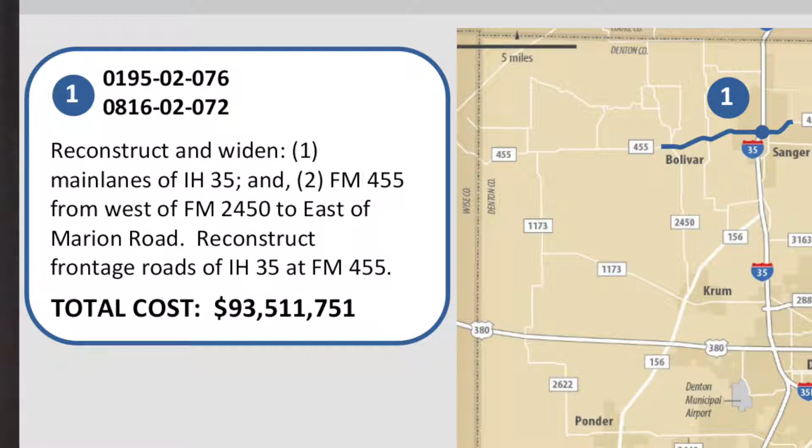The first one I'll talk about today is in the northern part of the county. This is the FM 455 interchange on 35 up north, including quite a bit of FM 455 as well, going through Sanger, headed west out to Bolivar. This is reconstructing and widening the main lanes of 35. It's not a capacity job for 35, but it is reconstructing the interchange at 455. It will be kind of that full build out, get a little piece of the frontage roads, but the main thing is to reconstruct the interchange as well as 455, and it goes from about FM 2450 to east of Marion Road. Again, it'll get a little bit of the frontage roads, but that's really not the primary purpose, which is mainly to get that interchange done.

So this is about a $93 million project. It let last week for construction, so we should be awarding that toward the end of July. If you've been out in that area, you've seen a lot of dirt turning already, and that's been the utilities relocating. We ought to see construction start probably around the November timeframe on this. So that is our 455 interchange project.

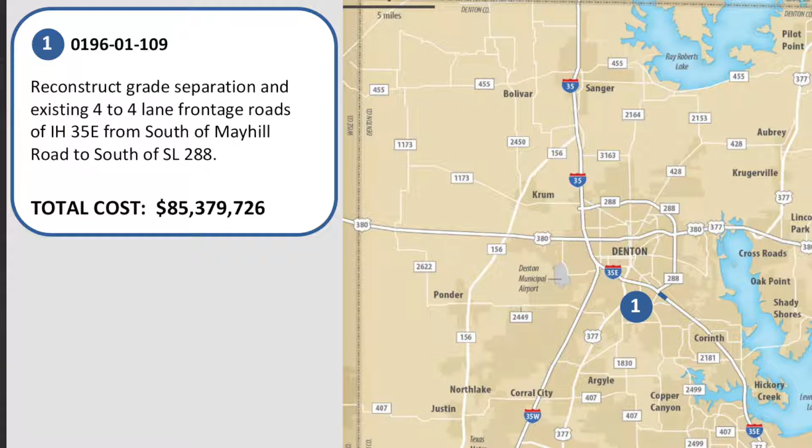Moving along, this is what we call our Mayhill job. I got a question on this one a minute ago, and I do have a slide for it. So we're working on what started as a reconstruction of the Mayhill interchange on 35E, south of Loop 288, and it has kind of grown into addressing some other issues in that area. It's going to reconstruct the frontage roads from Mayhill all the way to Loop 288, in addition to installing a couple of bypasses at Brinker.

If anybody's familiar with that area, there's a lot of traffic backup at Brinker, so when this project is complete, it'll add some bridges that you can bypass. If you're trying to get to Loop 288 northbound, for instance, or Lillian Miller, you can just bypass Brinker and won't have to stop at that light. So this is a really exciting project for us.

It's about $85 million, and the biggest focal point would be reconstructing Mayhill and widening underneath Mayhill to match both sides, because currently I think we're 4 or 6 lanes on either side of it now. So it'll open up underneath and give capacity under the roadway for Mayhill, also reconstruct some of the main lanes at 35, and then also all those frontage roads from Mayhill to Loop 288. This is a big project we've got coming. We're looking at probably letting toward the end of next year timeframe.

Also on 35, so I guess I jumped the gun, but big surprise, we're working on 35 some more, everybody. I hope everybody's really excited. I know there's probably a lot of shock, but anyway, to keep going, this is 35W. This is a very large project, and we're still working out all the funding because it's a little over $300 million.

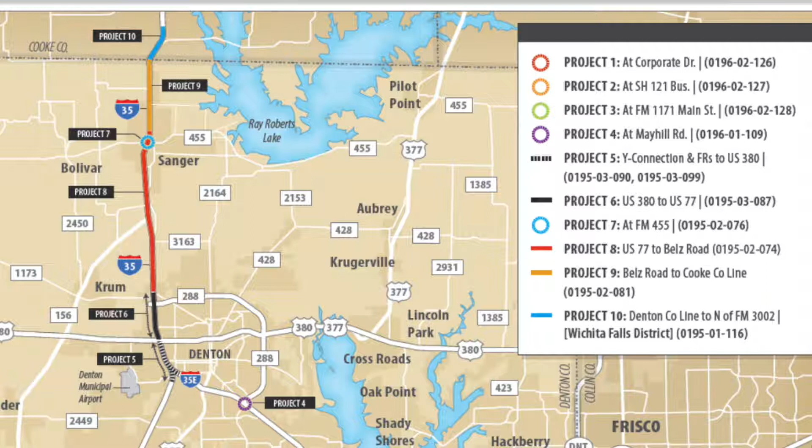Kind of the next biggest one is going to be the 35E and W. Depends on who you're talking to - some people call it the merge, some call it the split, I guess depending on which way you're coming. But I tend to call it the merge. So 35E and W, where we're reconstructing, it's basically going to be right where E and W come together, at Bonnie Brae and just south on W, and it'll go up through US 77. It'll go through 380, through Loop 288, and hit US 77. So that's going to be a very large project.

Little over $450 million right now, depending on when we actually go to construction. So that'll be a full reconstruction. Again, if you're familiar with the area, you probably saw us flip some ramps in the past year. That was a very successful project, we think, and we've got partners from City of Denton - we worked very closely with them. We were very pleased to get that deployed, and it's definitely helped, but this is going to be the ultimate construction of that. So this is building on some of the work we did there, but it's going to reconstruct the main lanes, the frontage roads, and the ramping in all of that area.

Are you guys through with, okay, where 380 and University intersect there, and y'all added another lane? Is that finished, or are you guys doing anything else? Yes, right there at the exit from 35.

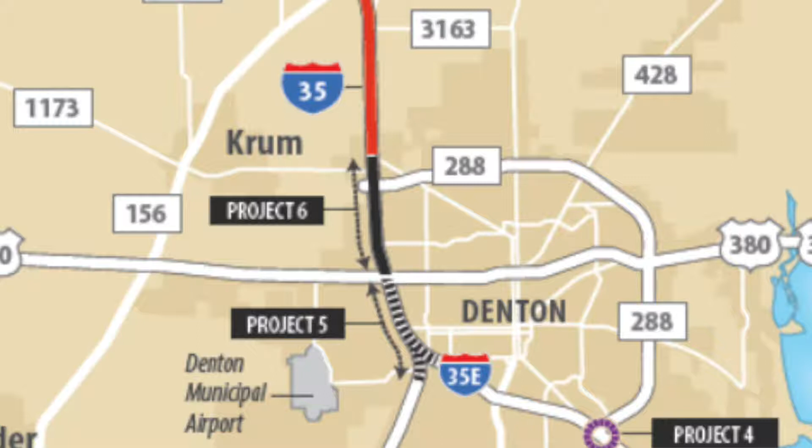Yeah, that's that interim project we talked about, where we recognized the need for something sooner, because this project needed to buy right of way and move utilities and those kind of things. So we saw the need for something we could do to help now. And yes, ma'am, that interim job is complete, but this will go reconstruct all of that. That project was to go out there and help improve safety today and not wait. This project will go reconstruct everything, add more capacity, new ramps, and those kind of things. But for today, we are complete with that project, and it's a stepping stone to get us to the ultimate project. And that's what we call the merge.

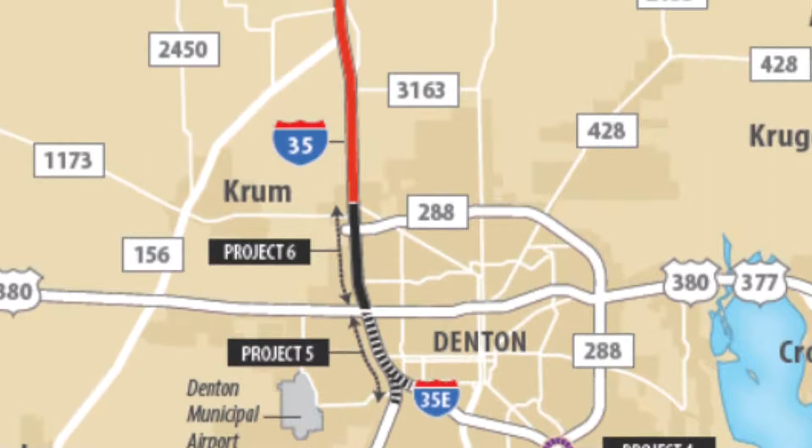And then as we go north, on the screen, that's the black project. As we go north we've got the red, the yellow, and the blue, and we call that 35 North - that's, of course, to my counterpart in Cooke County, that's 35 South to him, but for us it's 35 North. So that is a full reconstruction of 35, including the main lanes, the frontage roads, the bridges, crossings, the whole thing. Last estimate, I think it was close to 650 million, somewhere in that range.

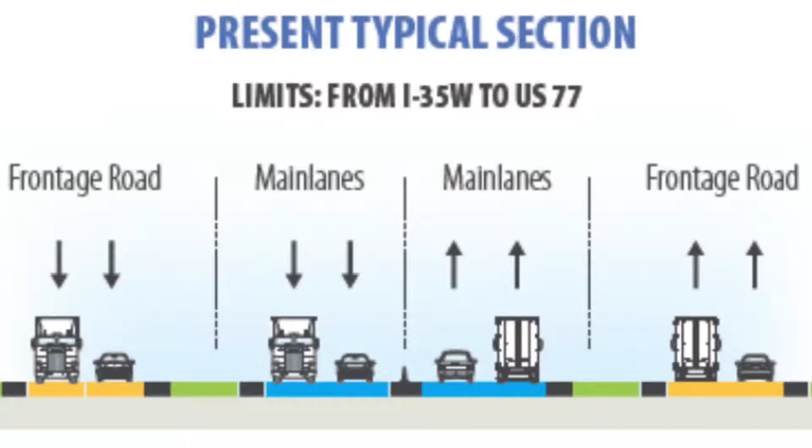And so we're working and breaking out into separate projects that'll continue to let. So 455 is already let. Next we'll see that merge in Denton, and then we'll keep working our way north. You can kind of see on the right hand of the screen where we've got 2 lanes going northbound, 2 lanes southbound, and those frontage roads. So the proposed is what's down there, and that purple is what we call our additional capacity - the extra lanes that will be part of the project when it's finished constructing.

All right, moving along here. I think I hit most of these notes already, so there's a lot of text - I'm sure they give the PowerPoint out. So if you want to go back and have some good bedtime reading, there's a lot of notes here. But ultimately, we've just wrapped the right-of-way on most of this project, so we're moving quickly into utility relocation to get the projects cleared for construction.

All right, moving along, what do we have here? So this is 1173 headed out to Krum from 35. This is a reconstruction - a 2-lane rural roadway today that's serving a quickly growing community. So this is a reconstruction to an urban type section with a median. It's going to be 3 lanes each direction, and there is some minor realignment - I guess it's not minor, it's pretty major.

So the east end of it where it connects to 35 is going to be shifted north to Barthold, just north of the Love's truck stop. That'll actually line it up with US 77 on the east side of the roadway. This project is a little further in the queue, but we are buying right-of-way for this project and moving utilities as well. It's about a $43 million job.

And then bumping a little further south, we've got FM 1515. This is very similar to 1173 in the sense that it's a 2-lane rural today. It will be reconstructed as a 4 to 6 lane, 4 meaning it might go in as 4 and ultimately become 6, a 4-6 lane divided urban, from Bonnie Brae to Masch Branch. It's a $35 million project.

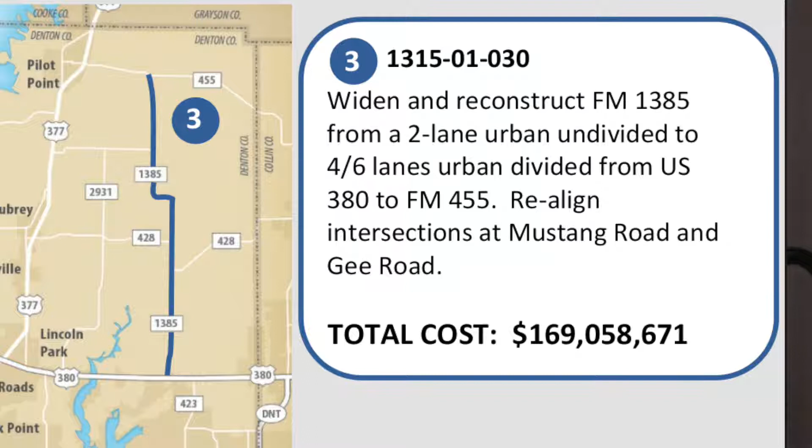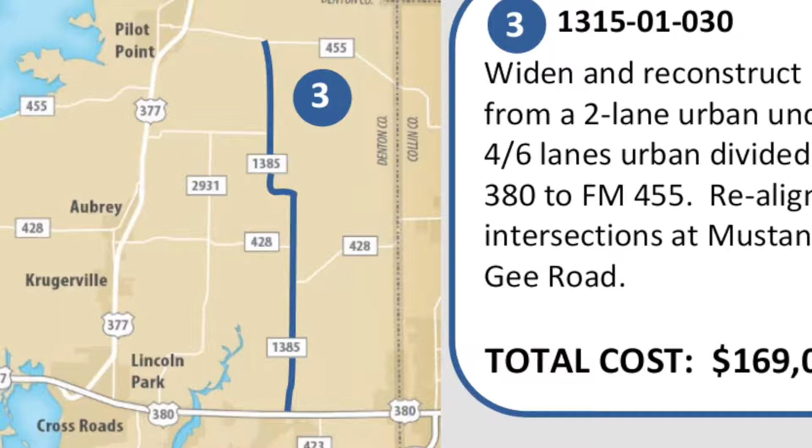We've got a couple more here. So over on the east side of the county, we've got FM 1385. Again, very similar to what we've been discussing, it's a recurring theme, right? As Denton is blowing up, we've got 2-lane rural roadways in areas that, and you all are probably a lot more familiar than I am, the communities that are rapidly developing along them. So again, similar theme - this is a rural roadway being reconstructed as an urban facility. When we say urban, that means it'll have the curb and gutters, the sidewalks, the medians in the middle, the grassy medians, those kind of things.

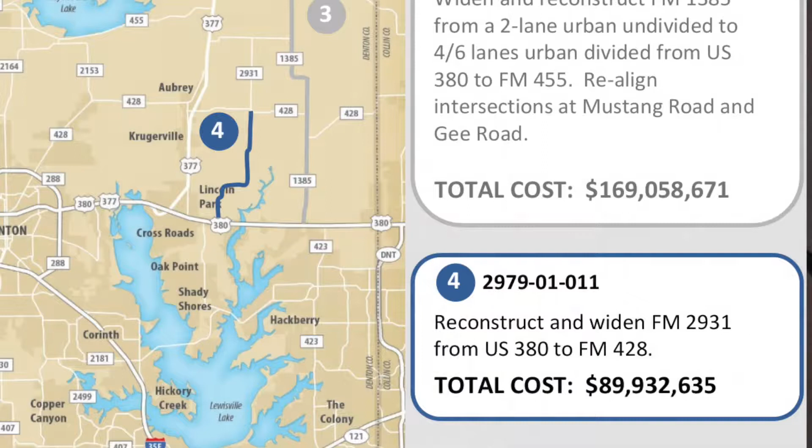And right next to it, 2931, exact same story - a rural 2-lane to the 6-lane urban. So 1385 is a $170 million job, and 2931 is another $89 million job.

So let me back up because I know one guy brought up was 380. So we are working on 380 now. 380 is in construction. There's kind of two parts of it. The first part is from Denton, and I don't have a slide on this, I'm sorry, but I figured I would talk about it here. So 288 on the east side of town to where 377 cuts up north. That's kind of the first phase that let first.

They're almost to phase 2 of their construction, and that job - the main lanes are there that are needed, but it's going in and adding that median in between the main lanes and ultimately reducing the speed, converting it from a high-speed facility to a low-speed facility. So that job, they've done the work on the eastbound side. They're shifting now over to the westbound side. And once they finish that, then they'll come back in and put the median in the middle.

Then if you go a little further east, you've got the job that just started construction - well, it's been 6 months now. So they started around January, and that's from where 377 goes to Pilot Point east to the Collin County line. And that is a reconstruction as well, adding capacity. Most of that area is 2 lanes each direction with the center turn lane. So this will go in, it will add the median in between. It will be 3 lanes each direction, as well as the 5 grade separations along the corridor so that it won't - it's not a freeway, but also you won't be stopping. You'll be kind of going up and over.

So why do we need this project? It was proposed to improve mobility, add capacity, accommodate economic development opportunities, and improve the safety of the traveling public, both local and regional travelers to the area. Because just across the border, there's the world's biggest casino, the WinStar Casino, so we got a lot of travelers going from Texas to Oklahoma to spend their money there.

I-35 is part of the FHWA and TXDOT freight network, which means it's identified by both the federal government and us as a primary source of where all the freight and supplies get shipped and moved through the state and the nation. It is also part of the Texas trunk system, which encourages economic development opportunities in rural areas. It's also part of the strategic highway network, which is used for military purposes, moving troops and supplies back and forth.

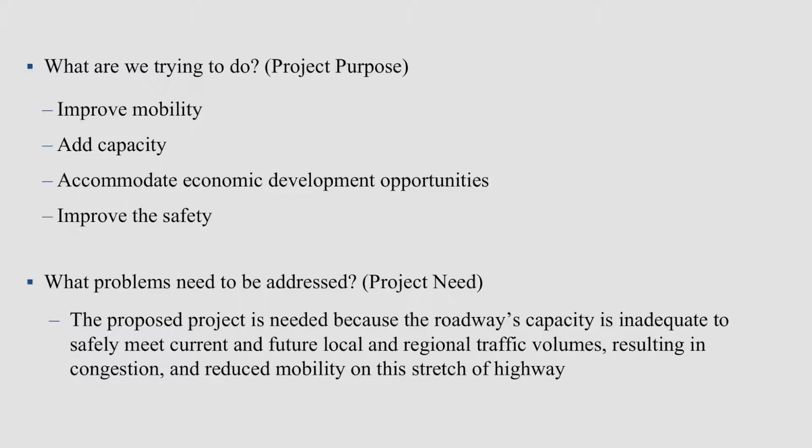What problems need to be addressed? The proposed project is needed because the roadway's capacity is inadequate to safely meet current and future local and regional traffic volumes, resulting in congestion and reduced mobility for this stretch of highway. Currently, I-35 in Cooke County has 44,000 daily travelers, projected to nearly double to about 88,000 in 2040, and 20 to 25% of that traffic is truck traffic.

So to help mitigate the congestion, it was proposed to widen the existing 4-lane facility to an ultimate 8-lane facility - that's 4 lanes in each direction. Currently, the 3 phases I'm talking about will be built as a 6-lane interim section.

So the ultimate 8-lane is 4 12-foot wide travel lanes with 2 10-foot wide shoulders on the inside and outside. The 6-lane interim is only going to be 3 travel lanes with a 12-foot shoulder, for future reasons. After we build the interim, we're going to come back, get more funding, build that 10-foot shoulder, then restripe everything so you have your 4 lanes and 10-foot shoulder.

Studies of one-way traffic patterns have identified one-way frontage roads as a safer option for travelers. So we've elected to convert non-continuous frontage roads to one-way continuous frontage roads. That means somebody can get on the frontage road in Denton County and go all the way up to Oklahoma just on the frontage roads if you don't feel safe traveling on the main lanes. You can do the same thing coming down from Oklahoma, all the way down into Denton County.

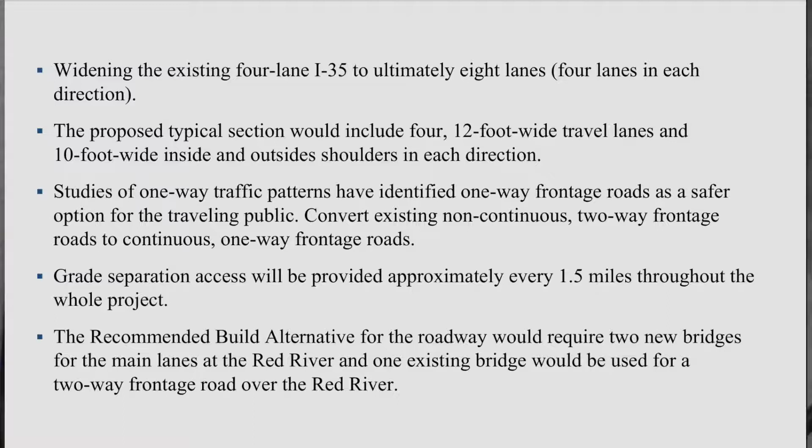Grade separations will be provided at approximately 1.5 miles throughout the whole corridor. All the grade separations will go under I-35 except for US 82, which is in the middle of Gainesville - it'll stay over I-35. In addition, 2 new bridges will be constructed for the main lanes, as well as one of the existing bridges. The current southbound structure will be used as a 2-way frontage road over the Red River.

That schematic has been posted online at TXDOT.gov. Y'all can search for it. Just type in I-35 Cooke County.

The estimated construction cost of that interim 6-lane facility I was talking about is approximately $677 million. That's for all 3 phases, broken up into 3 different projects. The additional $78 million we project is for the ultimate 8-lane facility, where we add on that 10-foot shoulder and restripe everything. That's a total estimated construction cost of $755 million, and of course that's expected to grow from here on out.

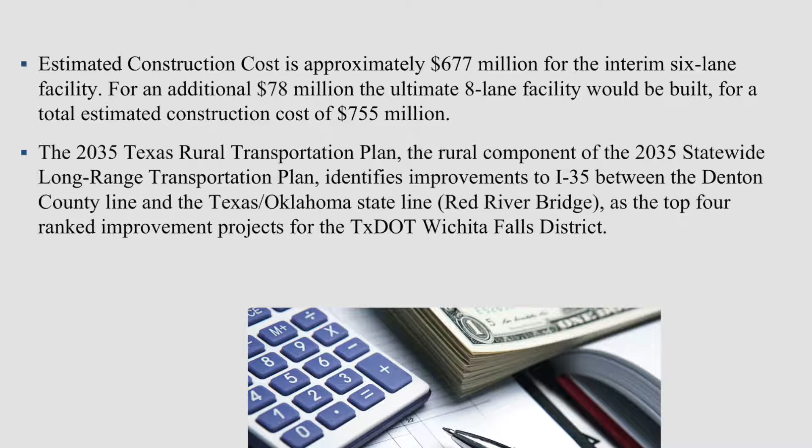The 2035 Texas Rural Transportation Plan, the rural component of the 2035 statewide long-range transportation plan, designated these projects from Denton County to the Oklahoma border as the top 4 ranked improvement projects for TXDOT Wichita Falls District. So if that gives you any idea, $755 million is over about a 10-year process. Our normal budget is around $100 million a year for construction and maintenance. So this is quite a big project for us in our district and Cooke County in particular.

It'll be finished in 2035? The complete project for 35? It's actually projected to finish in 2039, but that's kind of the long-range deal. Hopefully the contractors try to meet milestones. We've got early finish milestones, so hopefully they meet those and finish sooner than that.

Right-of-way acquisition: approximately 124 acres of additional right-of-way was needed for the proposed widening project. Of that, 163 parcels were dealt with. Of the 163 parcels, 6 were recognized as commercial properties.

2 had abandoned structures - a warehouse, which has been removed, and a motel, which is in the process of being removed. Of the 4 remaining, Luigi's Italian Restaurant and Joe McIlrath Company have already relocated, but Hilltop Conoco and Lone Star Exxon are still in the discussion phase of the right-of-way acquisition.

No residential displacements were anticipated on this project, and TXDOT does offer relocation counseling and financial assistance to residents and businesses displaced by the right-of-way acquisition process. If you go to TXDOT.gov, you can search for the Uniform Act or the TXDOT Relocation Assistance Program.

With that, I'm going to delve into the actual phases a little bit more. Like I said, phase 1 is under construction currently. It's about 7 miles long, starts just south of 82, and ends about 1.5 miles south of Spring Creek Road. Projected at $210 million - that's probably going to go up due to inflation and stuff.

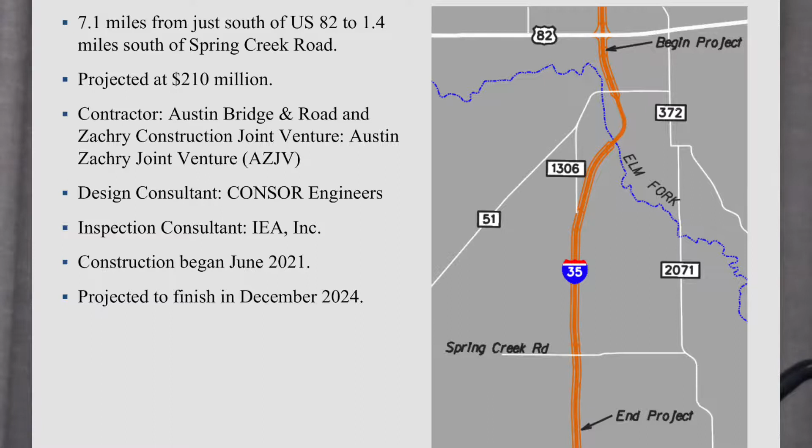Construction began in June 2021, and currently the contractor is on schedule to finish on time. Barring any unforeseen complications, they should finish by December 2024 or earlier.

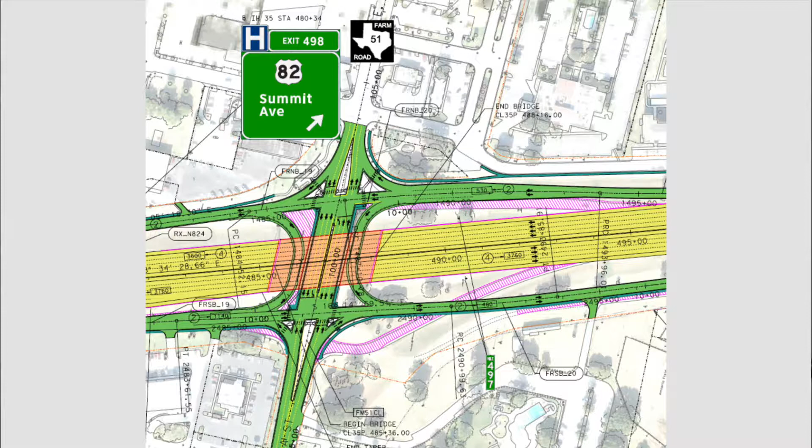This is a major milestone here. If anybody's familiar with the area, this is FM 51 through the middle of Gainesville, or California Street. It currently goes under I-35, but we are raising the structures to meet our minimum vertical clearance of 18 foot 6 inches. We're adding a Texas turnaround on the south - to your right, north is to the west, to your left. So we're adding the Texas turnaround south. And if you'll notice down there in the bottom right, that pink or purple is the existing direct on-ramp we had. We're removing that for safety reasons and building our continuous one-way frontage roads through town.

Here's another example of the increased factor of safety. This is a horizontal curve just south of 51, north of Elm Fork. The pink and purple is the existing highway. This curve meets a 75-mile-an-hour design speed, so that's part of that increase I was talking about earlier, where we expand on our design safety. Also, side note, I don't know if y'all can see the orange line up at the top, but that's the existing right-of-way.

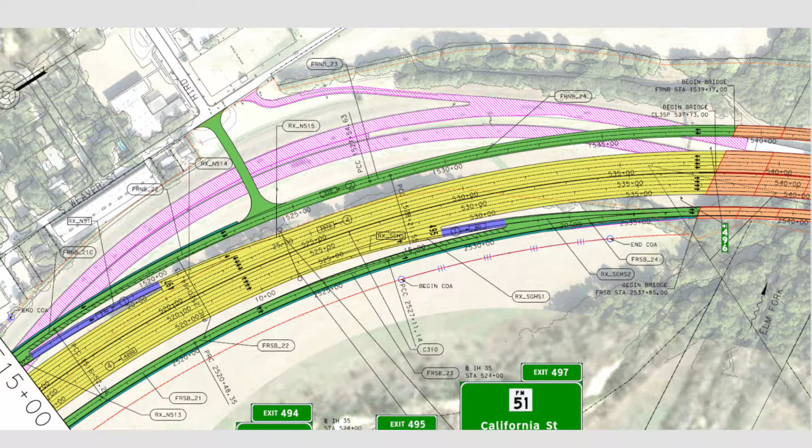So everything else between the road and the right-of-way is going to be state surplus. I don't think we want to keep that on our books, so that may go up for sale or get given away to the city, whoever wants it, after we go through that process.

This is another milestone, FM 1306 overpass. 1306 currently goes over the interstate, but we're flipping the stack at this location so it will go under the interstate. We're adding Texas turnarounds, and we're going to meet our vertical clearance of 18 foot 6 inches. And then we're getting rid of the jug handles. You can see the pink or purple areas there for a more conventional intersection.

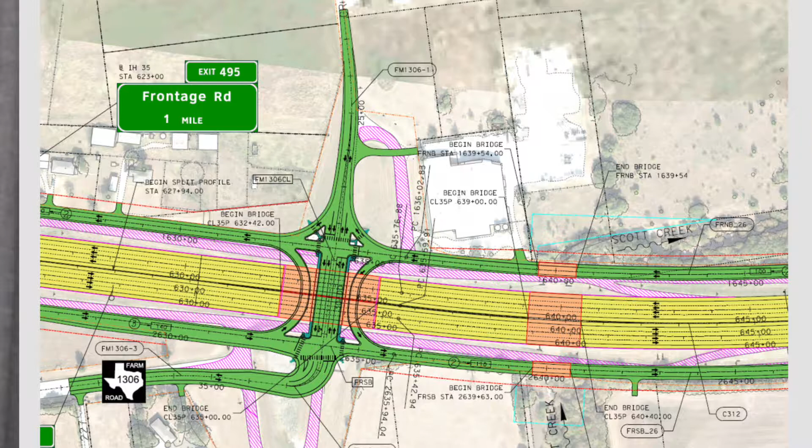This is the last overpass on this section of highway, Spring Creek Road. It currently goes under the interstate, but like I said, we are lifting the bridges to meet our vertical clearances, and we're pulling in the frontage roads just a little bit there. You can see the pink and purple. That way we can meet a conventional intersection for the frontage roads. Again, that's probably going to be a lot of state surplus in that area.

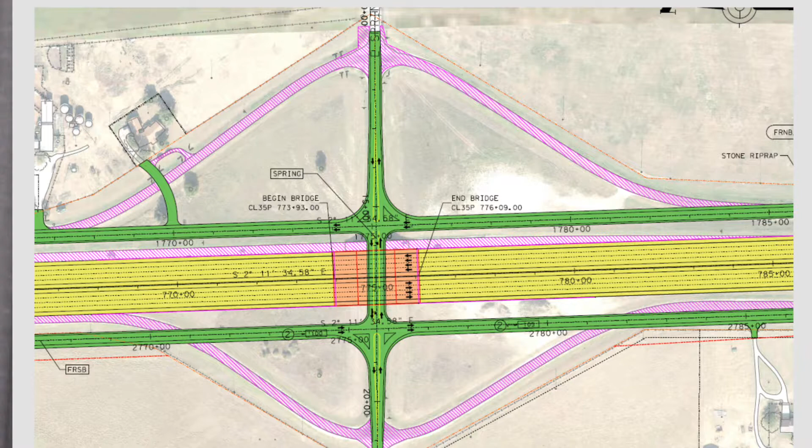So phase 2 is our north section, about 7.3 miles long. It's going to start at exit 1, Merle Wolfe Road in Oklahoma, and continue south to just south of 82, where our current construction project began. It's projected to be $280 million, and like I said, they just reran the numbers, so now I think it's up to $310 or $315 million. Contractors are unknown, we haven't gone through our design, bid, build, letting process yet.

We're currently in design. After they finish with design, we'll put it out for letting for the contractors. Lowest bidder gets the job. Design consultants are CP&Y Incorporated. Inspection consultants are CONSOR Engineers. They'll be held to the same standards as IEA is in the current construction process. Scheduled to begin construction June 2024, projected to finish November 2029.

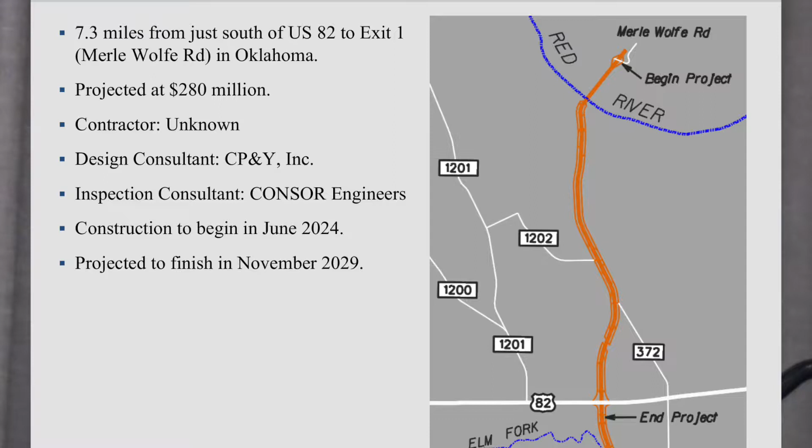Like I said, these are projections, these aren't reality. As we get into construction, that tightens down because they want to meet their milestones and earn more money. Phase 3 is the south section, about 5.6 miles long. It's going to begin where our current section ends, just south of Spring Creek Road, and end north of FM 3002.

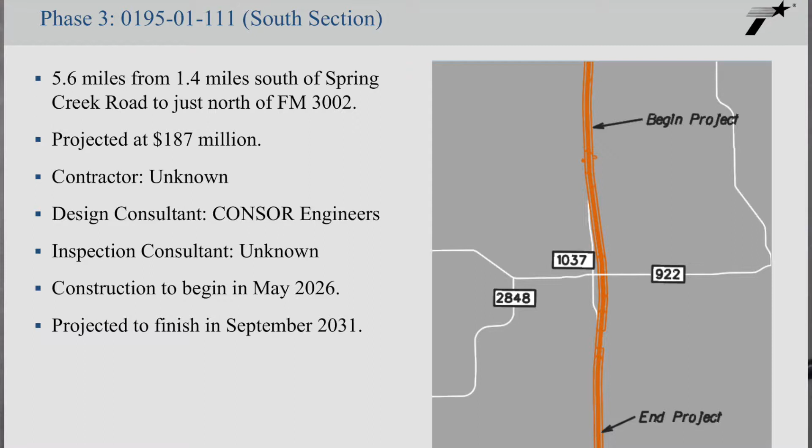Construction is set to begin May 2026, projected to finish September 2031. We're trying to push that 2026 date up closer to 2025, so that way we don't have this entire construction project going on for over 10 years.

That'll go to our PIO, Public Information Officer, Adele. For any additional information on the current status of the projects, you can join our Facebook group or Twitter at those handles. If you want to find traffic phases, construction information, or plan details, you can go to I-35.org, which also expands to 35 throughout the state. For traffic conditions and closures, drivetexas.org covers any roadway in Texas. Project Tracker has details on future phases in the area at that website.

Like I said, we're a little bit more of a rural county, so the rest of our projects aren't as flashy as Denton or Wise or Collin County. We're taking small 24-foot roadways that may or may not have a shoulder, widening them, and putting on a 3-foot shoulder.

Another major project we have is in Montague County. From Nocona west, we are dividing that highway. It's currently a 2-lane roadway with Super 2 passing sections. We're dividing it into a 4-lane divided highway, so now 82 will be divided from Wichita Falls all the way east, however far that goes.